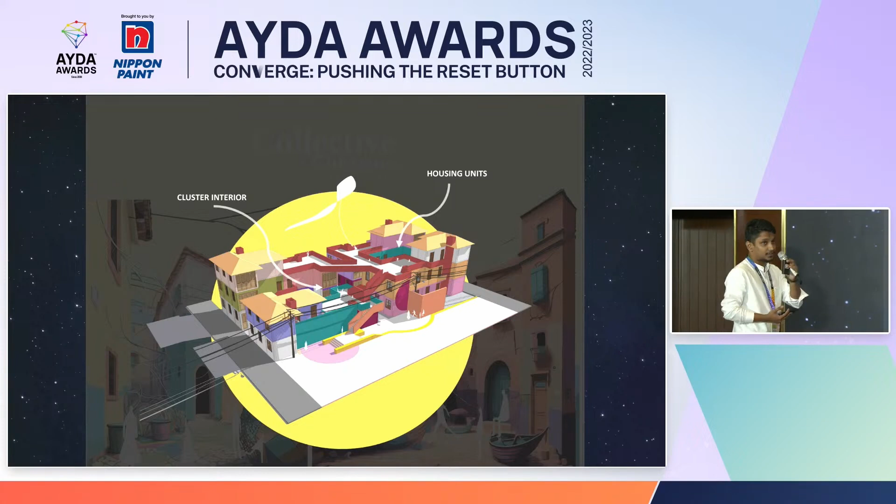And as you can see, the center space is the cluster interior space and the housing units are woven around it. One of the things that we have to understand as designers is, at the end of the day, this is going to be a residential interior project. So it needs to maintain simplicity, because there are people who are going to live in it. So the simplicity needed to be maintained by using specific techniques. Technique number 1, fluidity.

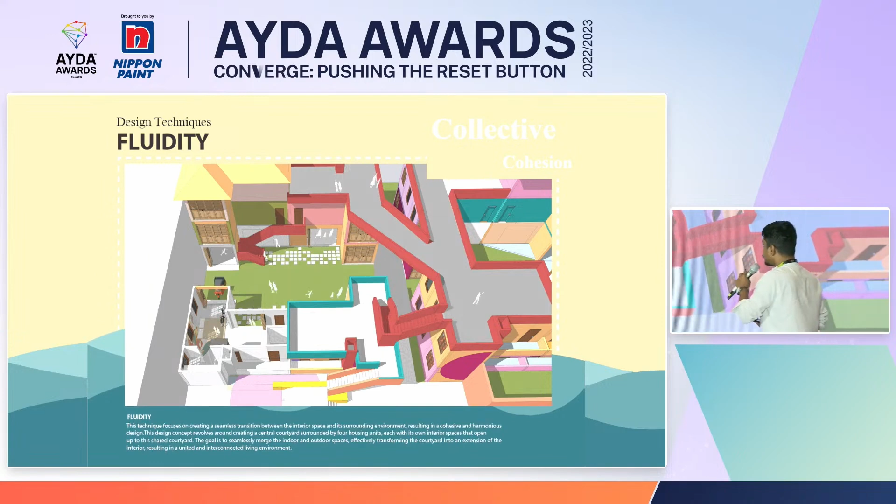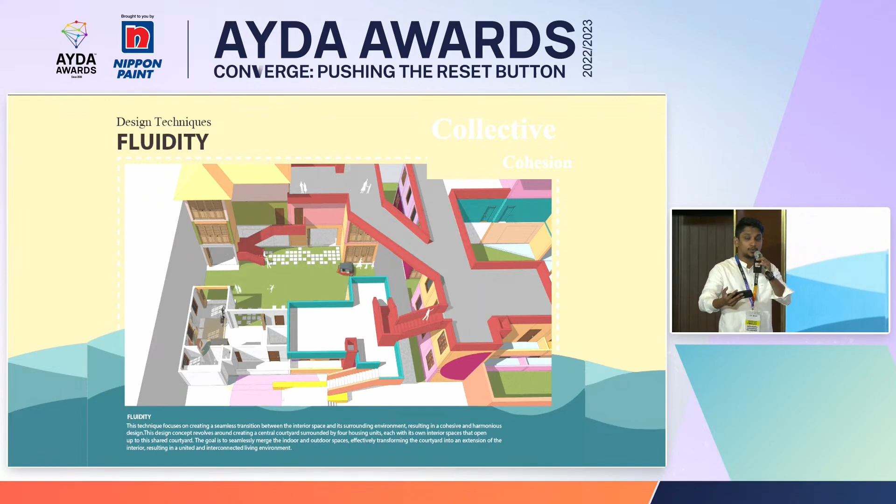In terms of fluidity, as I explained in my previous slides, the center space is called the cluster interior space, where the boundaries between the interior and exterior space are getting blurred. In interior design, we call these spaces interior thresholds. And the fluidity of the functions was maintained throughout the exterior and interior to improve the interactions of society and community cohesion.

And as architects and as designers, it is really important to understand the power of colors to create emotions and atmospheres. So in this design project, I have intentionally used warmer colors in the cluster interior spaces. And I have used cooler colors in the housing interior spaces to maintain the seamlessness, the calm, and the tranquility in the interior space.

Deliberate integration of cultural connectivity was also one of the key elements in the design process. It was incorporated with the symbols, beliefs, and traditions that they had, and it's all about them. So it helped me a lot to foster a sense of belongingness and resonate with their mindset on a much deeper level.

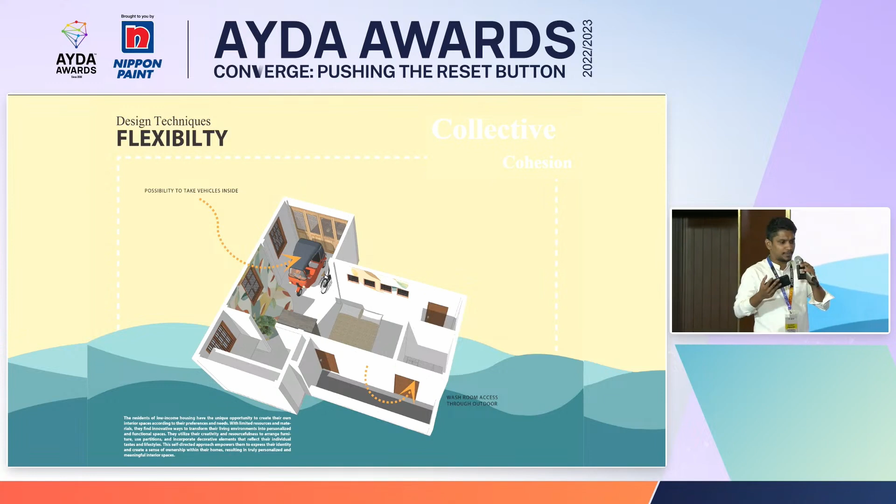In terms of flexibility, this is an illustration of the modular unit which I am proposing. Since I'm not providing any partitions in the middle of the space, it gives 100% flexibility to its users. And what I also noticed was, for most people, the most precious thing that they had was their vehicle, be it a small timber boat, a trishaw, or a cycle. So they tend to keep their most precious thing in their eyesight. That idea was respectfully incorporated into the design by giving the possibility to take vehicles inside.

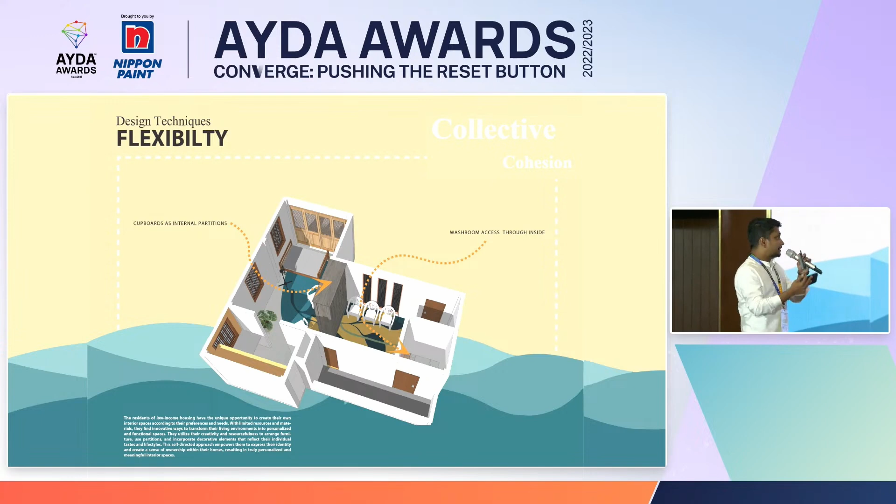And in terms of partitions, since I'm not proposing any partitions or separations, the residents had the option to use cupboards not only as storage but also as partitions. And one of the things I also noticed in this community was that some people are not used to accessing washrooms directly through their hall spaces. So separate access to washrooms was given, respectfully understanding their mentality and their behavior.

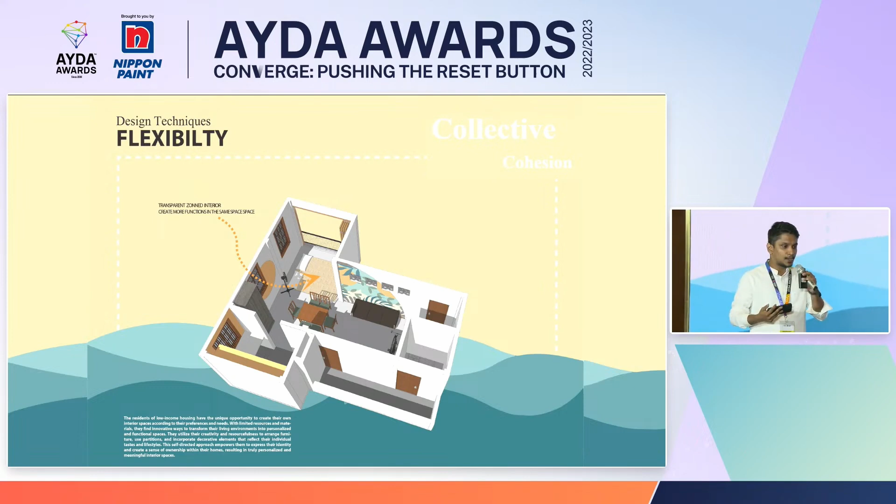And one of the key elements that I also did is, since this is an open plan, in interior designing there's a technique called transparent zoning. Transparent zoning means when we are getting an open plan like this, we place main functions of the space in corners of the space. So it intangibly separates and zones out the whole space, and residents use it according to the zoning types, and so on. So that was that.

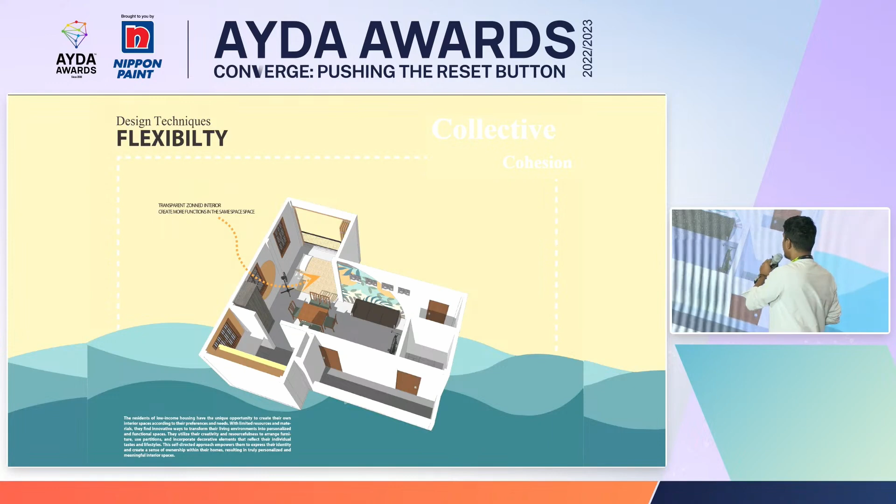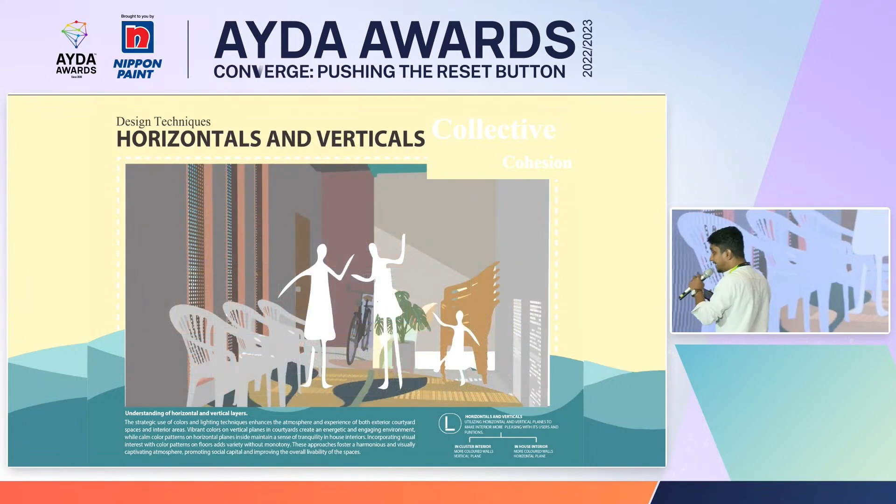So most of the time, in cluster interior spaces where the public would always gather around, the color patches were used in vertical planes to inject the energy, the vibrancy that I wanted to pump in. And most of the time, the horizontal planes were used in interior spaces for the color patches, to use the colors without obstructing the views.

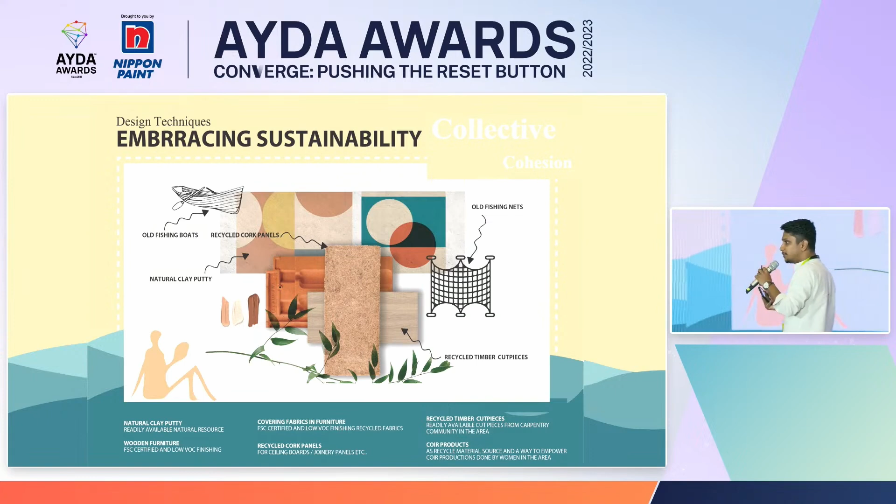In terms of embracing sustainability throughout the design process, there were certain materials that I used: old fishing boats, recycled cork panels, natural clay putty, and old fishing nets. And one of the key elements that I noticed on the site was coir production. Most of the time, women do coir production in the daytime, so those products were also incorporated into the design.

One of the things I also noticed was, since this is an old fishing community, they had a lot of timber, old fishing boats, and small boats. So I used those elements as well, and incorporated them into the design as roof structures, sculptures, seating elements, and so on.

And old fishing nets I used as wall hangings, room dividers, and ceiling installations, and they also played a role in sensory perception in the kids' play area, as each color in the fishing nets has a different story. Sri Lankan fishing nets have a yellow color to explain a background story, and Indian fishing nets have a separate color to tell another story. So that idea was also incorporated into the design.